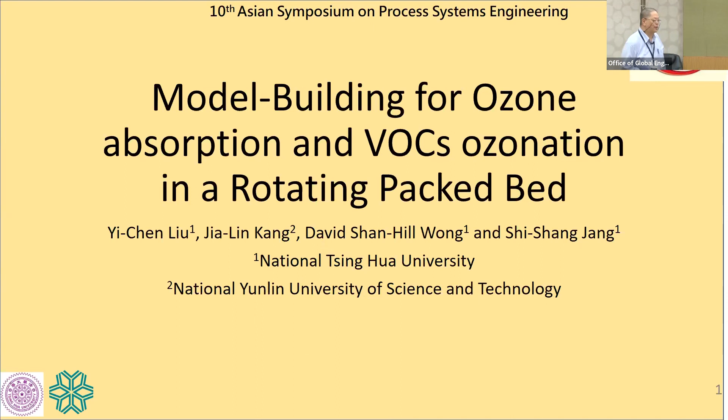Utilization of high gravity to enhance mass transfer in a rotating packed bed, which I'll call RPB later on, has been a very well-known process intensification technology. The application of RPB to improve the efficiency of ozone degradation of volatile organics has been studied extensively in the literature recently, because the problem with ozone oxidation is that it is very difficult to get ozone to be dissolved in the solution and effect the oxidation. But in these experimental studies, each person developed their own empirical correlations, and there is no way to know whether the models are consistent with each other.

So in this work, we propose a generic model that can describe oxygen and ozone absorption in the experimental data, as well as using those data to develop the model for mass transfer and ozonation of volatile organics. Two examples, o-cresol and phenol, are used as validation examples. In addition to developing the model, we want to explore the key factors influencing this process.

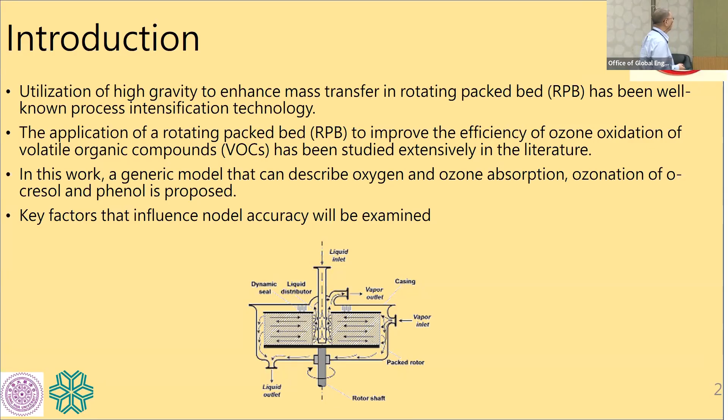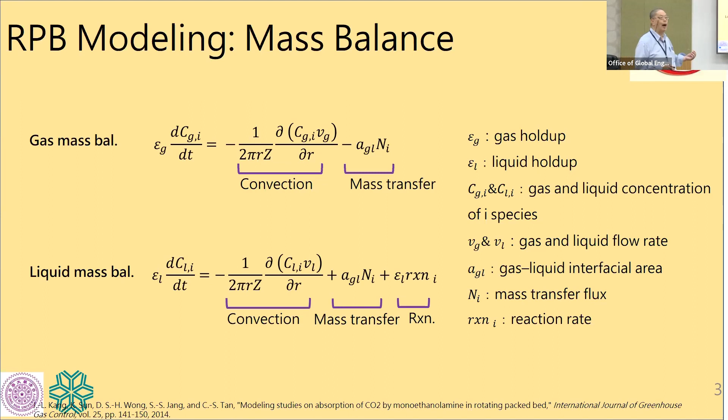The model for RPB is very simple. It's a one-dimensional spatial temporal model that accounts for the convection, mass transfer, and reaction in the system. But there are two key factors in this model. One is the mass transfer between the gas phase and the liquid phase, and the other is the reaction in the liquid phase. Reactions in the liquid phase are usually well studied using independent batch type reactors. So the key is whether those reaction kinetics can be used in conjunction with a mass transfer model developed for RPB to properly describe our process.

For RPB mass transfer, usually we model the mass transfer rate as an overall gas phase mass transfer coefficient times the pressure gradient. Pi is the pressure of the component in the gas phase, and Pi star is the equilibrium partial pressure at the gas-liquid interface. The overall mass transfer coefficient is influenced by two factors: one is the gas phase resistance, and the other is the liquid phase resistance.

However, for the liquid phase resistance, because of the reaction, some of the materials will be consumed near the interface, creating a film. The reaction will increase the mass transfer, and this factor is known as the enhancement factor. So in developing a mass transfer model, the key is which types of liquid phase and gas phase mass transfer we use, and how to describe or model the enhancement factor.

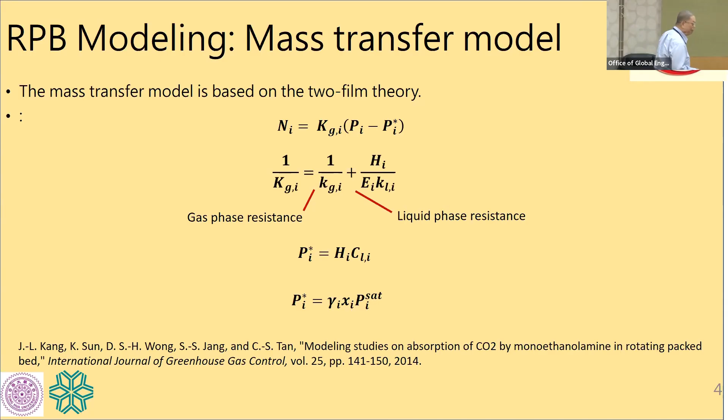Okay, let us return to this mass transfer coefficient. The definition of the enhancement factor is the liquid phase mass transfer coefficient for absorption with chemical reactions over the liquid phase mass transfer coefficient for absorption without chemical reaction. For gaseous components that have no reactions, we can do experiments and develop the model for the liquid phase mass transfer coefficients for absorption without chemical reactions. But for systems with chemical reactions, we have to find the proper kinetics that can describe the enhancement factors.

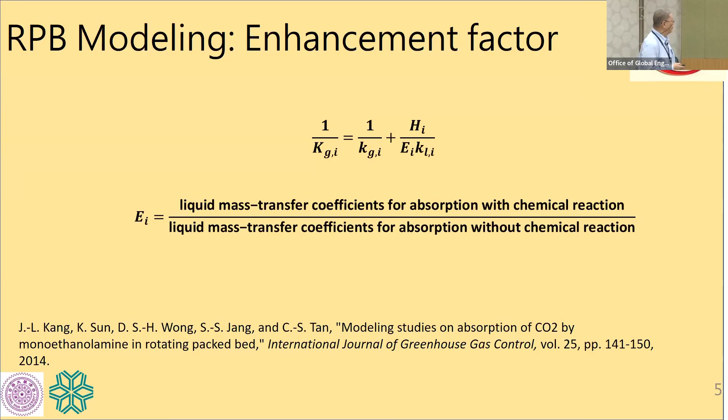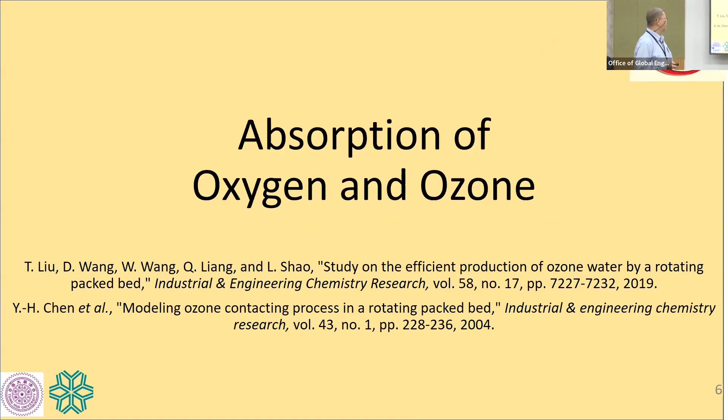So we look at absorption of oxygen and ozone. The data were provided by Professor Chen at CYCU in Taiwan, and also the group by Liu et al. on ozone reactions. These are the common mass transfer models proposed in the literature, trying to describe gas and liquid mass transfer. These are common, well-developed mass transfer coefficients.

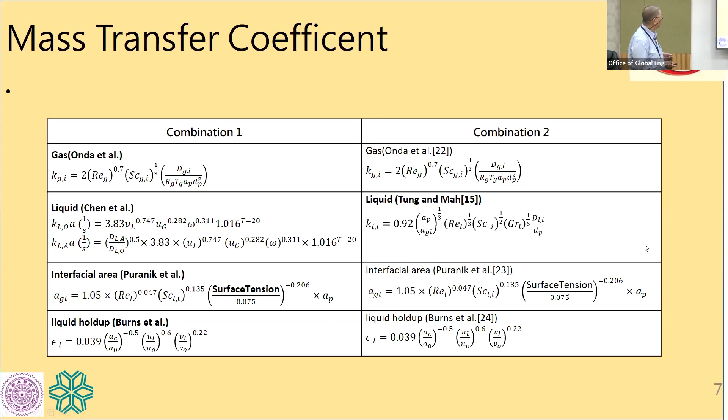For oxygen absorption, it is very clear that oxygen alone will not react in the liquid phase. So this is a very good system for us to validate what kind of gas and liquid phase mass transfer coefficients are appropriate. According to the experiments, we found that the model proposed by Chen is very good, much better than the older liquid phase mass transfer coefficient proposed by Tung and Mah a number of years ago. This is a particularly good experimental system for validating the liquid phase mass transfer coefficient, because all we did was to change the liquid phase mass transfer coefficient.

If you test our models, most of the resistance is in the liquid phase. Whether we neglect or include gas phase resistance, the model predictions are exactly the same. So this experimental system is dominated by liquid phase mass transfer, and it is a good system to look at pure liquid phase mass transfer.

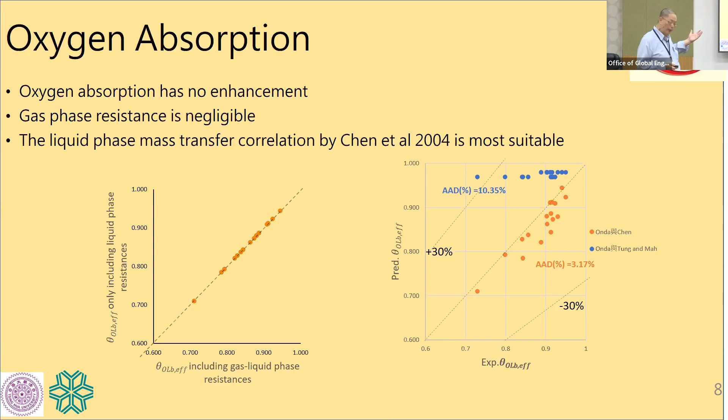Oh, sorry, the title is, so if you use this liquid phase mass transfer and look at the enhancement factor for ozone absorption. Okay, now we have ozone absorption, and ozone will decompose in water, and we find that zero order decomposition reaction is very good describing the model with the Chen model for liquid phase mass transfer, which gives an average of 17%, which seems large, but these experiments are very difficult to perform, and experimental errors are very large.

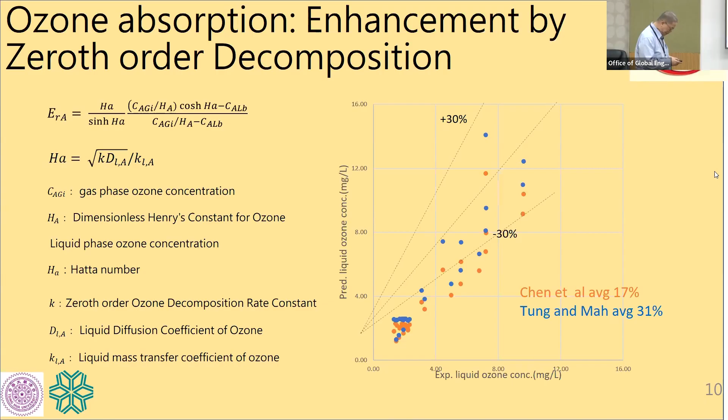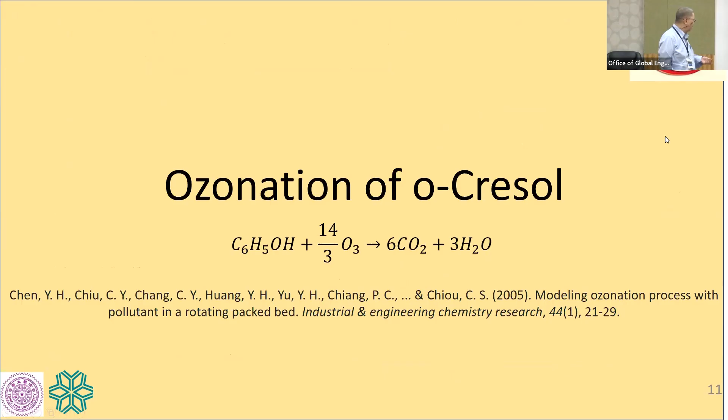Next, please. So after we have established the liquid phase mass transfer model for oxygen and ozone, we look at o-cresol. Okay, the overall reaction of o-cresol is like this, and experimental data was also provided by Professor Chen and his co-workers in 2005. But if we do the same thing to the model, and we assume that there's a first order enhancement by VOC, the results are completely off the chart. Actually, the predictions are much higher than the experimental values. Next, please.

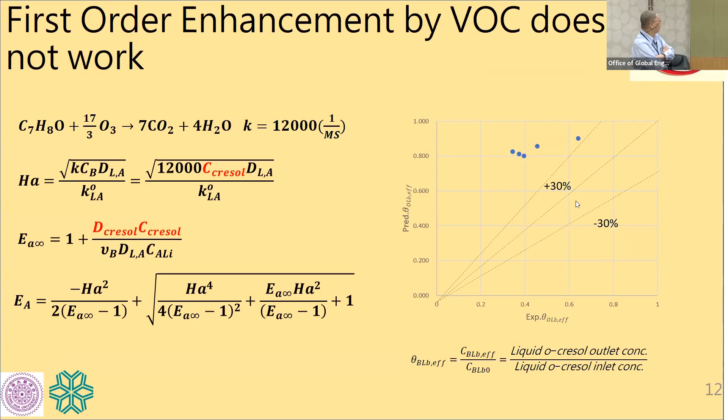Okay, it turns out that the kinetic parameters provided by the experimenters are done using acid buffer, using phosphoric acid and sodium hydroxide. So the actual detailed mechanistic step is not a reaction between ozone and the VOC, but it involves intermediate reactions between the ozone and the acid. So if we just replace the VOC concentration with the phosphoric acid concentration, the results become very good. Okay, so this is for the ozone, o-cresol system. Next, please.

We do the same thing for the phenol system, and for the phenol system, the data was provided by Zeng et al. in 2012. Next, please. And again, if we use phenol as the first order enhancement factor concentration, we find that the model under-predicted the experimental results. So again, using the VOC concentration itself does not work.

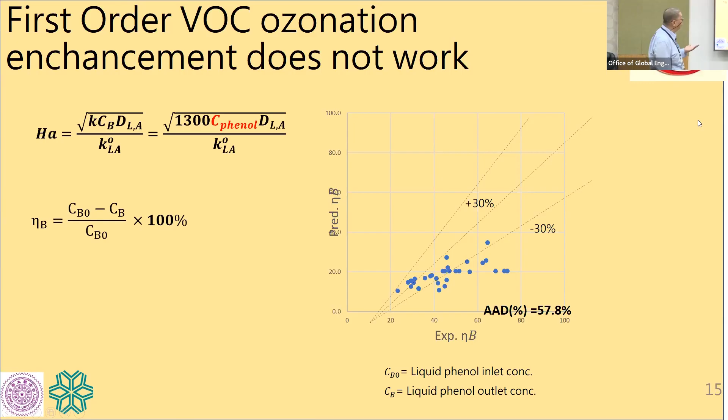Next, please. It turns out it is also an acid-catalyzed reaction, and sulfuric acid was used at various pH. They actually provide pH data for different sulfuric acids, and we can use the same reaction constant, but instead of using sulfuric acid, we use the concentration of the bisulfate and the sulfate ion. We can get excellent agreement with experiments.

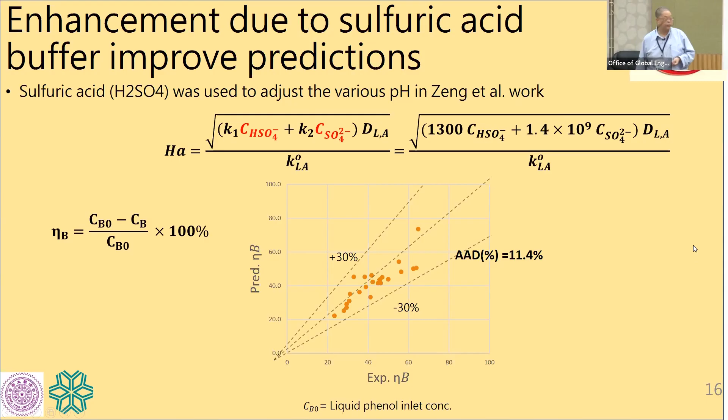Next, please. So in conclusion, we have proposed an RPB model that can predict the phenomenon of ozonation of VOC in the RPB. Absorption of ozone and oxygen is dominated by liquid phase mass transfer, and the mass transfer is best described by the correlation proposed by Chen et al. in 2004. VOC ozonation is catalyzed by acid. So instead of a first order enhancement factor using the VOC concentration, we find that we should use the acid concentration in the first order enhancement factor. So this is the key to modeling ozonation of VOC in RPB.

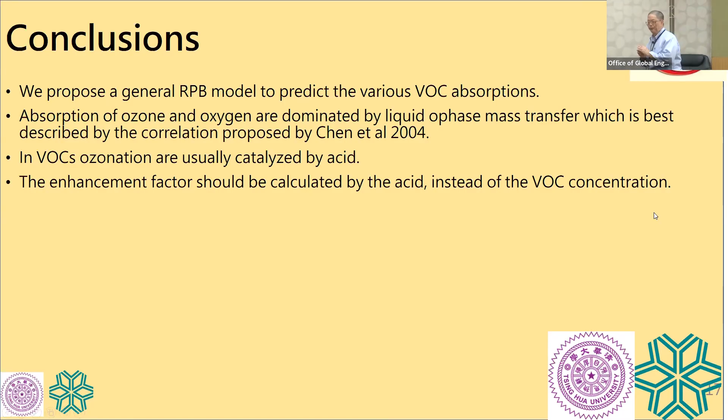Yeah, so I have one small question. You talked about, instead of VOC concentration, we should incorporate acid concentration. But in one place you are directly using one ion, and in the sulfuric acid you have two. So how do you decide? Because depending on the acid, things can change. Yeah, but the kinetic constants we use are obtained by those experiments using different acids. So they already have proposed a K value for those reactions.

But the overall reaction is written as a reaction between ozone and the VOC. If we use VOC concentration and these kinetic values, it doesn't work. So instead, we find out that if we use the acid concentration but the same K values, then we are okay. So that means the key step in enhancement is a reaction between the ozone and the acid, not between ozone and the VOC. Okay, so I have to write an equation between ozone and acid also, and find the kinetic parameters for them too?